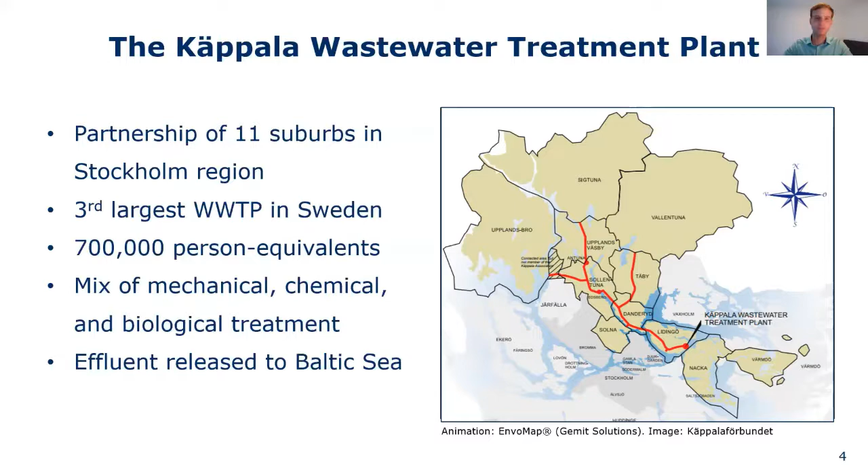So upstream of many wastewater treatment plants, a wide variety of chemicals might be used, either at homes or at various industrial facilities. And down the drain, spills of these chemicals can lead to toxic shock of the microorganisms that are within a wastewater treatment plant.

A scenario like this occurred at a sewage treatment plant outside of Stockholm, the Syvab Wastewater Treatment Plant, where in the fall of 2013, a chemical was spilled down the drain and made its way to the treatment plant. And after about a month of the chemical having contaminated it, the nitrification capability of the microorganisms in that plant had been completely knocked out.

And in the graph here on the right, we can see the outgoing ammonium plotted on the y-axis. And as a result of this toxic chemical spill and the resulting contamination, the outgoing ammonium increased by several factors for a prolonged period of time, on the order of months.

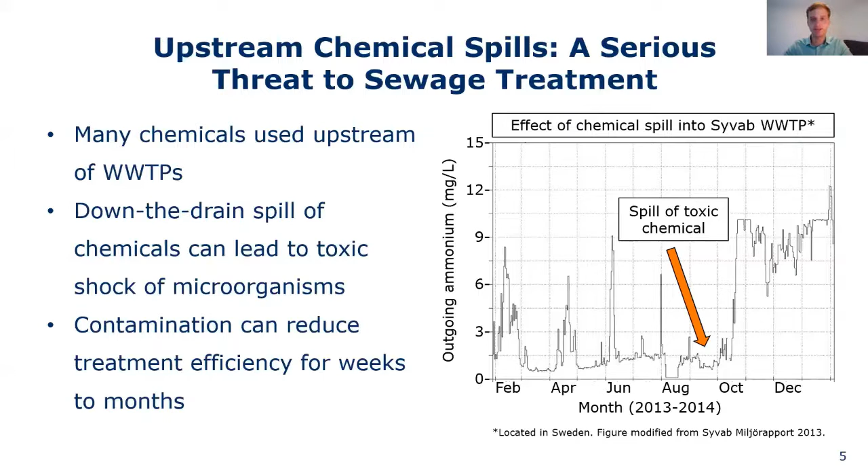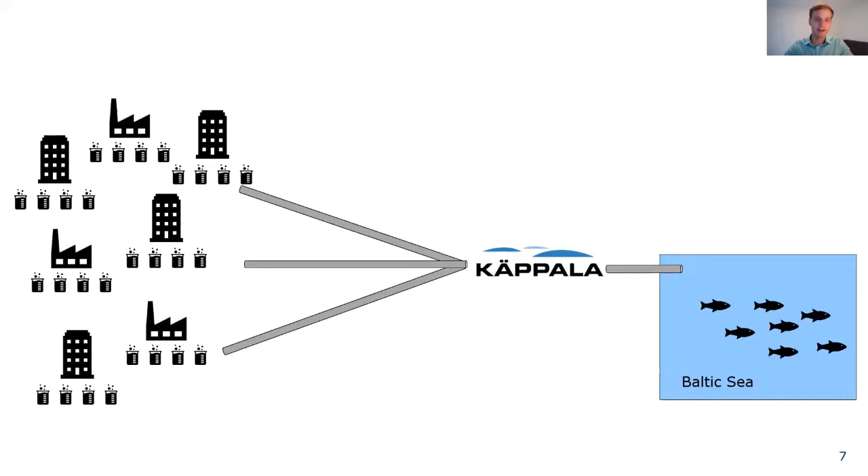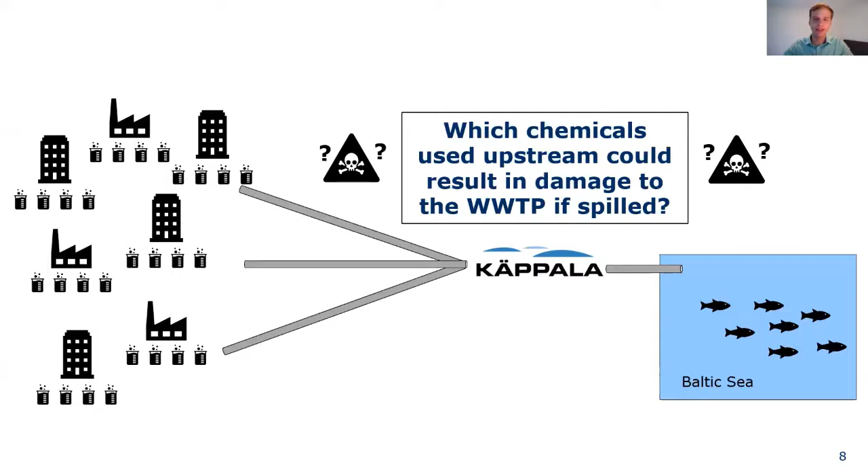So within the EcoRisk 2050 project, Käppala approached us with this concern about the large number of industrial facilities and chemical products that are used upstream from them. And that provides our driving question for this work: which chemicals used upstream of the Käppala Wastewater Treatment Plant could result in damage to the treatment plant if they were to be spilled? To answer this question, we need to know three pieces of information.

One, what chemicals are used and in what quantities? How toxic are these chemicals? And what will the concentrations of these chemicals be in the biologically active regions if they were to be spilled?

So to answer the first question, what chemicals are used and in what quantities? Käppala conducted a survey of over 100 industrial facilities upstream, asking these facilities for a list of the chemical products that were used, the various chemical constituents within these different industrial products, and the amounts of industrial product that were held in stock at one time.

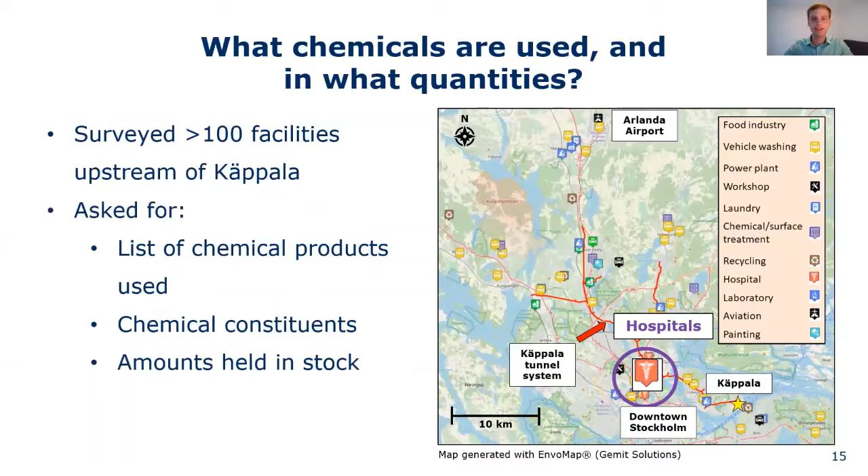They collected information from a wide variety of industrial facilities, including vehicle washing facilities, power plants, and hospitals in the Stockholm region. I'll walk you through an example of the kind of data that Käppala collected from these different facilities.

So for a different facility and chemical product pair, the maximum amount of chemical held in stock at one time was collected, along with the amount of chemical used throughout the entire year, as well as the constituent chemicals within that industrial chemical product, reported as the CAS numbers of those chemicals, as well as the concentration of each of those CAS numbers within the bulk product.

Now, unfortunately, for many instances, the amount of chemical product held in stock at one time was not reported, and only information on the amount of chemical product that was used was reported instead. So this sort of information was gathered for the wide range of facilities for the various chemical products used upstream of Käppala. And from that roughly 100 facilities surveyed, we've narrowed down our data set to about 60 different facilities, comprising about 1,500 different chemical products.

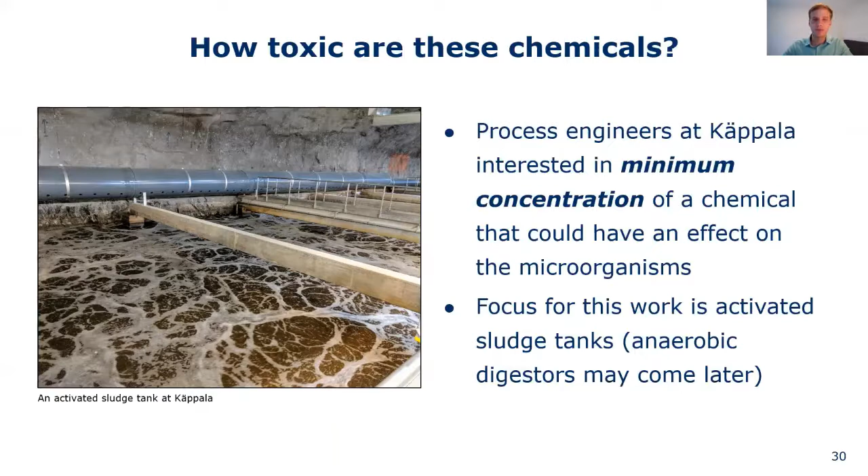Moving on to the second question, how toxic are these chemicals? The process engineers at Käppala are interested in the minimum concentration that a chemical would have to have within the treatment plant in order to start having an effect on the microorganisms. For our work here, we're going to focus on the microorganisms in the activated sludge regions of the treatment plant. There are microorganisms used in the anaerobic digesters, and our work might focus on that, but for now we're only focused on the activated sludge tanks.

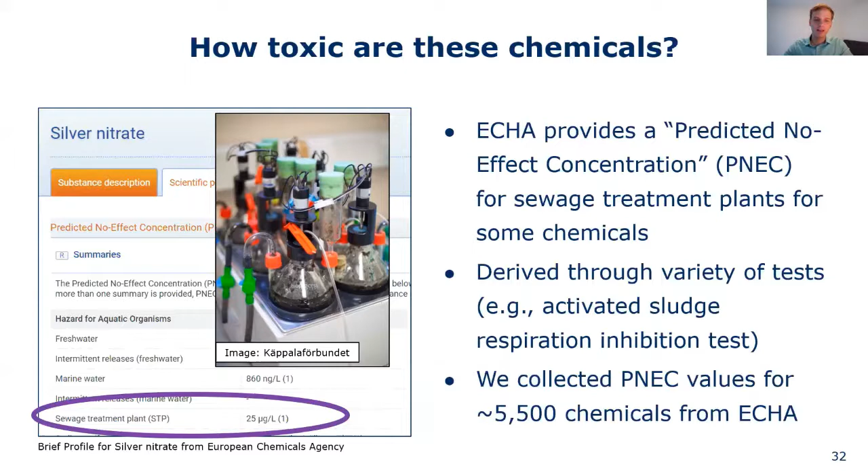Luckily for us, the European Chemicals Agency provides a predicted no-effect concentration, or PNEC value, for sewage treatment plants for some chemicals. These toxicity values are a maximum concentration that a chemical could have within the wastewater treatment plant before it would start to have negative impacts on the microorganisms in the plant. These can be derived through a variety of tests, such as the activated sludge respiration or nitrification inhibition tests. I won't go into detail about how these toxicity values are actually derived, but I will just say that we collected about 5,500 different chemical PNEC values from the ECHA website.

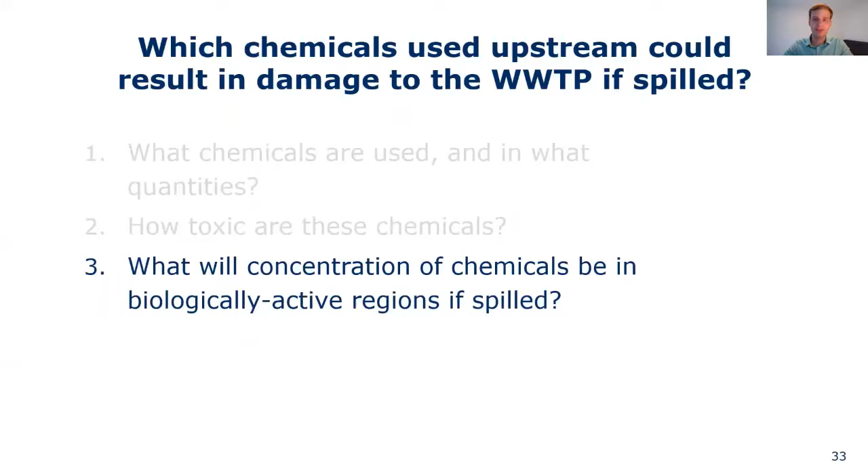So moving on to our third question, what will the concentration of these chemicals be in the biologically active regions of the plant if they were to be spilled? To answer this question, we consider high-end exposure scenarios.

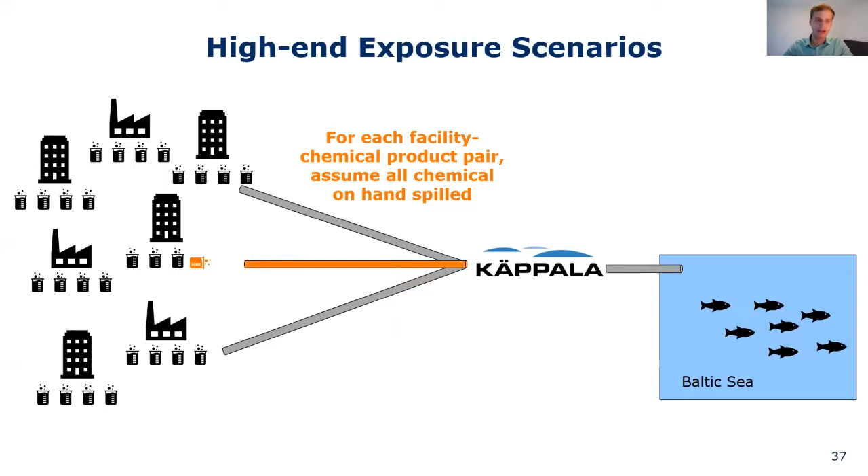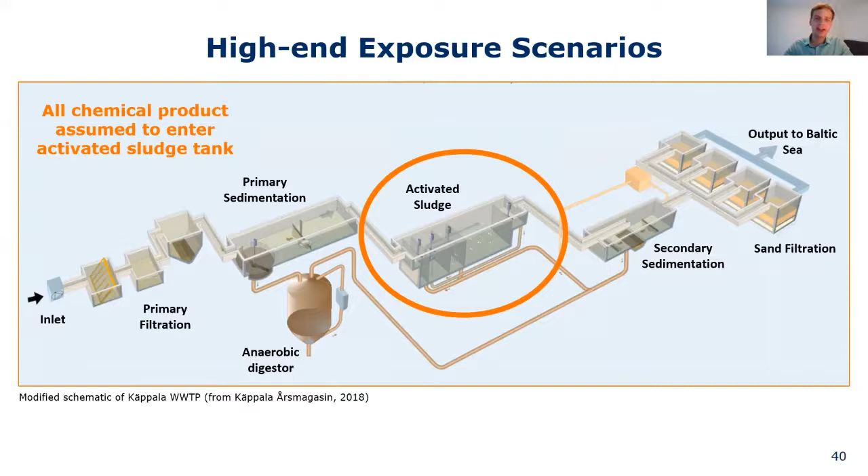So for each facility in each chemical product, we assume that the entire amount of chemical held on hand at one time is spilled, makes its way down the drain, and makes its way into Käppala. Once it's in Käppala, we assume that the entire mass of chemical enters only the activated sludge region, and from that volume of the activated sludge region and the mass of the chemical product, we can incorporate the chemical toxicity value to derive an estimate of the potential risk that that chemical poses to the treatment plant.

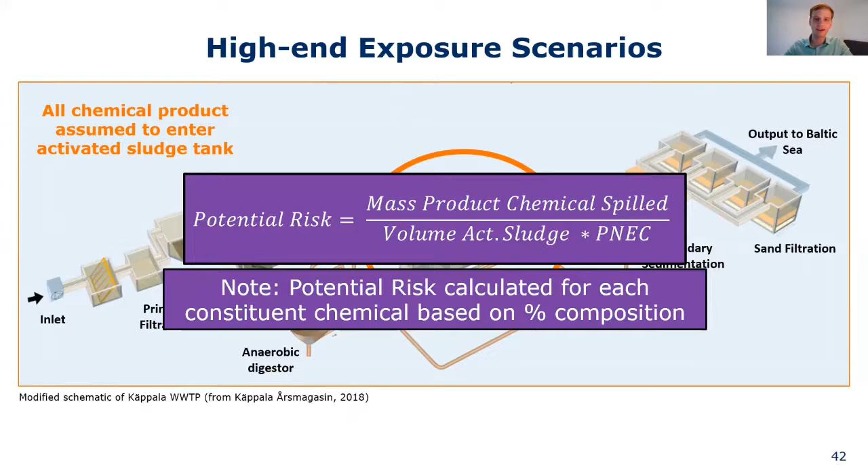I'll note here that this potential risk is calculated for each constituent chemical within an industrial chemical product based on the percent composition of that constituent chemical. Now, as I mentioned before, not all facilities report the maximum amount of chemical held in stock at one time. Rather, in many instances, only the yearly usage amount of a chemical is provided and not information on the maximum amount of chemical held in stock.

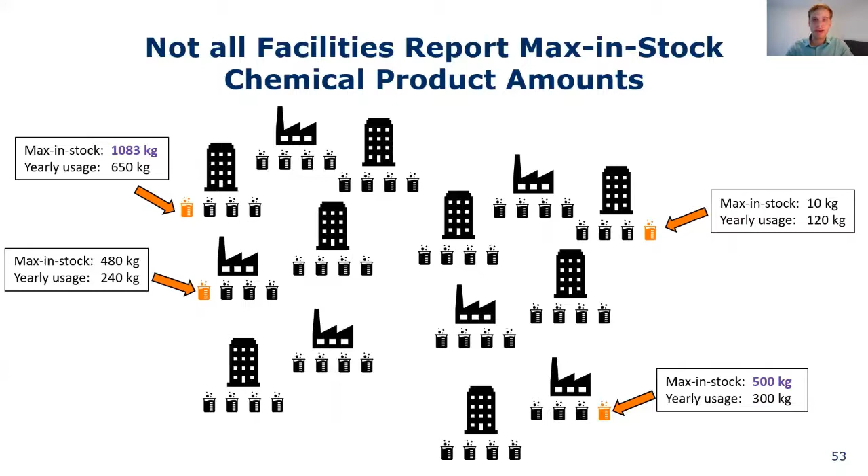Here we select the 80th percentile of this distribution and use that information to extrapolate the instances where we only have a yearly usage amount of a chemical product to an estimate for the maximum amount of chemical they might have in stock at one time. So here our assumption of the 80th percentile of this distribution corresponds to about 20 months. So with this relationship, we can apply this correction factor to the instances where we only have the yearly usage data amount to estimate a maximum amount of chemical that these facilities hold in stock at one time.

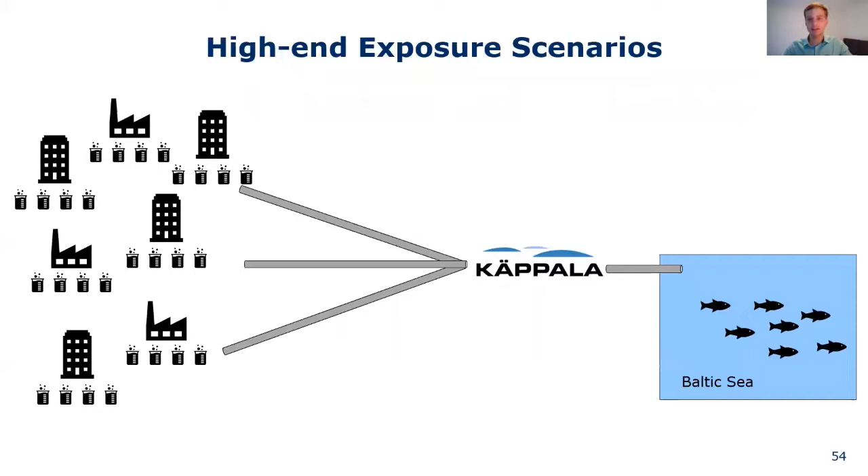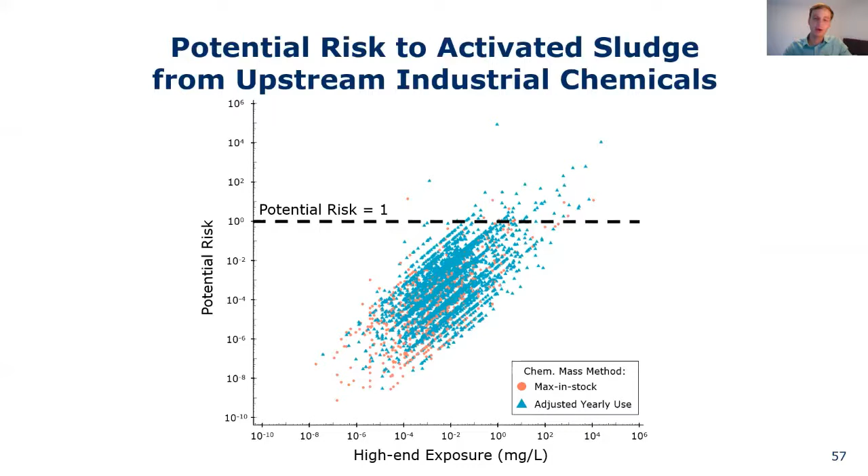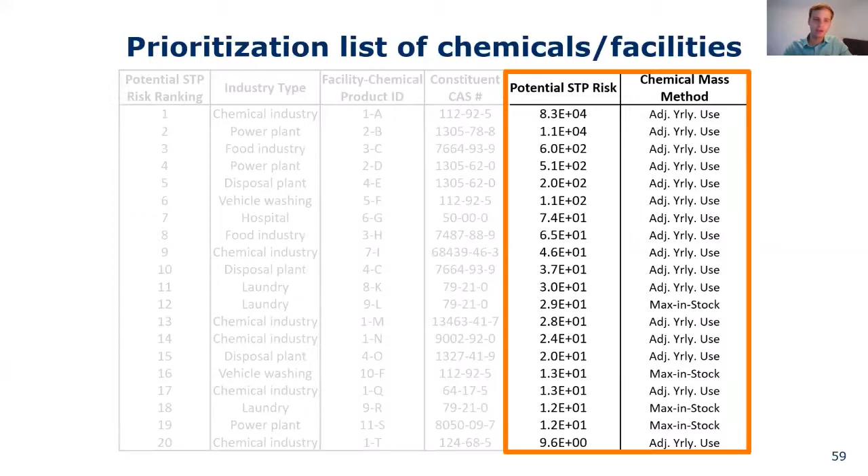Now, what really stands out from this figure is that the potential risk value for the vast majority of chemicals is far below 1. For these instances where the risk value is at or above 1, we can take the information that we have to derive a prioritization list of chemicals and facilities. Such a list is shown here, where we have anonymized the facility and chemical product information, but we've retained the constituent CAS number information and also the potential risk that each chemical poses, and the method used to derive the maximum amount of chemical held in stock for our calculations.

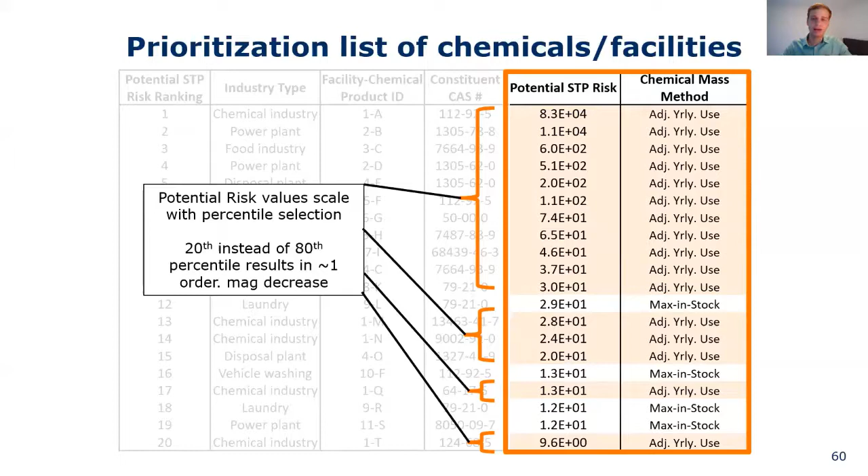Now, for these instances where we extrapolated our yearly usage chemical amount to estimate the maximum amount of chemical held in stock at one time, the potential risk values are scalable by our selection of the percentile that we used several steps before. We had selected the 80th percentile of number of months of chemical held in stock, corresponding to about 20 months of chemical. If instead we selected the 20th percentile, which corresponds to about 2 months of chemical held in stock, the risk values here would be lowered by 1 order of magnitude, and all but one of the chemicals highlighted here in orange would still have a potential risk value above 1.

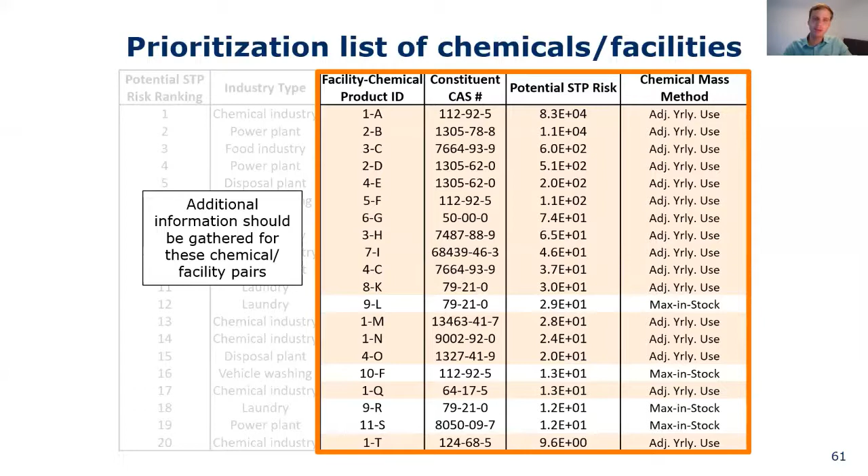Ultimately, though, Käppala can use this prioritization list of chemicals and facilities for additional information gathering to help constrain these potential risk values. It's very important to note, though, that we were only able to calculate this potential risk for instances where ECHA provided a PNEC value for our chemicals of interest. And that was only for about 59% of the chemicals within our analysis, leaving roughly 37% of chemicals without any toxicity value and thus no potential risk calculated. To fill this information gap, we are currently working on a statistical modeling method to predict these unknown PNEC values.

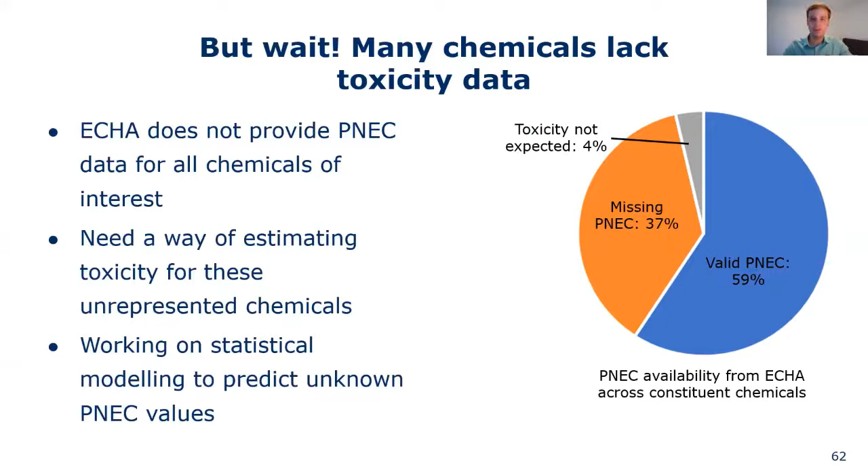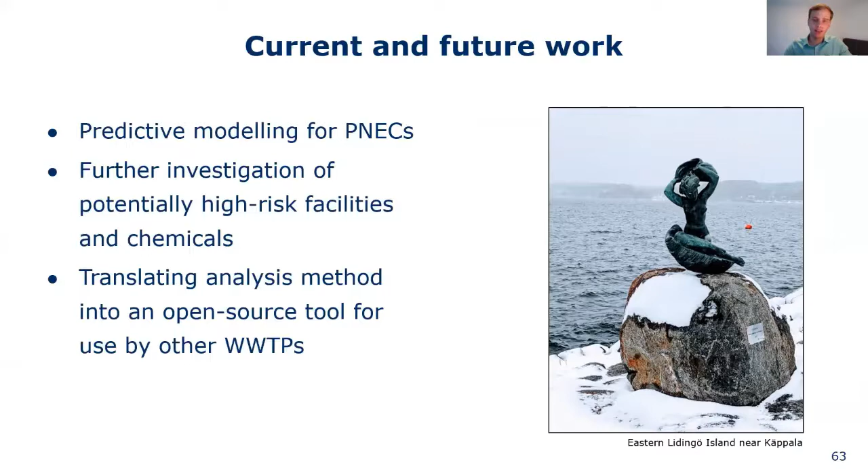In addition to this statistical modeling method for predicting PNEC values, further investigation is needed for those potentially high-risk facilities and chemicals based on our prioritization list, and we are also working on translating this analysis method into an open-source tool for use by other wastewater treatment plants. So the take-home message from this work is that we've developed a method for prioritizing risk to wastewater treatment plants from potential upstream chemical spills. We found that potential risk exists to Käppala from various chemicals used upstream, and the prioritization list that we developed will help facilitate communication and further information gathering with these high-risk facilities and potentially help implement spill mitigation measures if those end up being required.